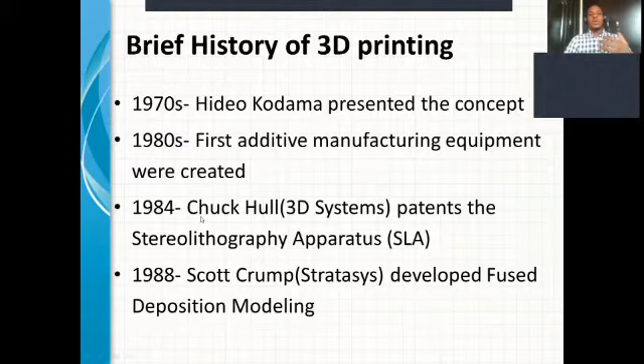In 1988, Scott Crump of Stratasys developed the FDM. These two men are seen as the big names in 3D printing, and they dominated the sector for over 20 years thanks to their patent authorities.

Here is a picture of the first 3D printer made by Stratasys, the first working printer. The beauty of technology is that technologies rely on each other. At the time they were making 3D printers, they were also working with the first computers being made by Apple and stuff like that. So technologies were being formed as at then.

Then in the 1990s, something happened. People wanted to create their own forms of this technology, because Scott Crump and Chuck Hull had patented a particular type of technology. So if you wanted to use it, you would need to pay royalties or get their licenses, which would hike the prices of the printers. So people started developing new technology so they could have their own patents around 3D printing.

So you started having technologies like SLS and DMLS coming up, and several others. Moving on from the 1990s, we have the 2000s. And trust me, this is just as brief as the history can be, there's a lot more to know about it. We have the RepRap movement and all that, but you can research on that on your own.

What I want to take note of is 2009. Something great happened: the FDM patent expired. I call it great because it helped 3D printing grow, but for the companies it was a problem, because normally 3D printers were very expensive—you had to remove a percentage and pay the company that created the software, then pay other bills here and there. That adds to the cost of the machine.

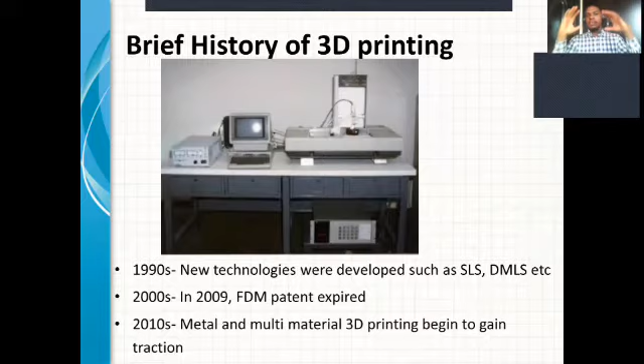Then in the 2010s, we started seeing metal and multi-material 3D printing gaining traction—printing of ceramics, bioprinting, metal printing. People were forming different materials for 3D printing. And that is where we are today. The 3D printing industry has moved from just something Chuck Hull was working on in his lab to something that is a worldwide technology today.

So what is this 3D printing? Before I go into that, I'd like you to read this: it says that 3D printing is disrupting the $12 trillion manufacturing industry, and companies like Ford and Siemens are training workforces to adopt these skills in this technology.

What I would love you to take note of, and personally I like to look at money, is the $12 trillion there. I'm sure many people here are Nigerians—I'm not sure $12 trillion has a name in Naira, but it's a lot of money.

And that's the sector that 3D printing is trying to disrupt. This was given by a journalist at CNBC, and this was his report. This shows that 3D printing is not only something that's fun, but that companies are actively looking to adopt the technology.

So let's give you the definition of 3D printing. It's as simple as can be: a process of making a 3D solid from a digital file. That's why I chose this picture, as a simple explanation. If you look at the monitor, you see a digital file of a 3D object, the Eiffel Tower of Paris. You see the process, which is the printer, the orange SLA printer on the other side. And then you see the 3D object that came out of the process, the three-dimensional solid object. This picture summarizes the 3D printing concept.

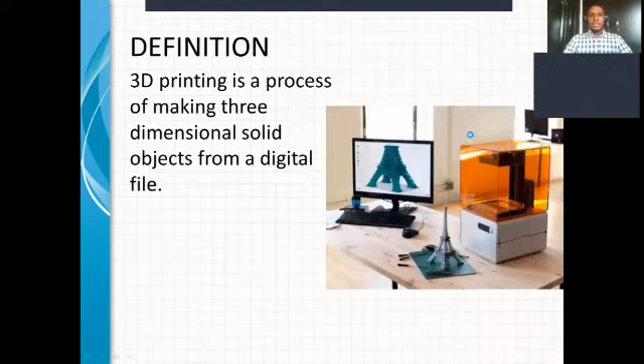All right, thank you, Osage. So, popular types of desktop 3D printing: we have FDM and SLA. The FDM is called fused deposition modeling. The name FDM was patented and trademarked by the company that founded it, Stratasys, so the company has rights to the name. Therefore, other manufacturers formed the name fused filament fabrication so they can represent the technology on their own end. Now another form of 3D printing is SLA.

I'll explain SLA a bit with this next slide. SLA is a photochemical process by which light causes chemical monomers to cross-link together to form polymers. That's a lot of chemistry, and I'm sure people are wondering what this all means, but basically, SLA uses UV light to harden liquid plastic. It has the liquid plastic in resin form, and the light hardens it layer by layer. That's as simple as you need to understand it. You can see the SLA machine inside, and this hatch stuff is the plastic that it's forming.

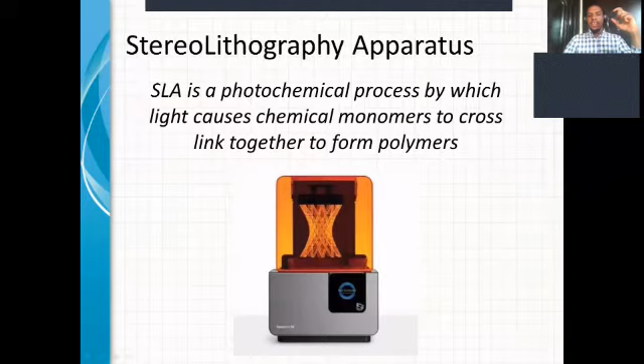Then we have FFF or FDM, fused filament fabrication. This is a separate process that involves continuous laying of filament on a 2D plane to form a three-dimensional object. What do I mean? Let's picture a regular inkjet printer. If you put in a piece of paper and tell it to print, it brings out ink continuously on a single plane, and when it's done, it stops. That process of forcing out ink on a single plane is actually the first layer of forming a 3D object. So 3D printing, instead of having a single cycle, has continuous cycles that lay layer by layer, and instead of ink, it releases plastic.

So how does it release this plastic? There's something called a temperature-controlled heater, which is what makes FDM unique. As against other technologies, FDM has a means of melting the filament, then releasing it into the atmosphere through the nozzle. Once released into the atmosphere, it immediately solidifies, forming your three-dimensional object. So it's a simple solid that melts, then releases to form another solid. That is the process around FFF, or FDM. I want to keep using this acronym so you get used to the terminology.

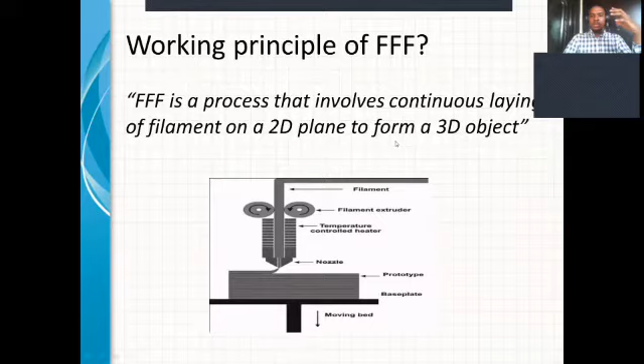So what more is there to know? Why is it included in the fourth industrial revolution? So many people ask me, what's up with this fourth industrial revolution? Why do we need to care about the industrial revolutions and stuff like that? So I would like to talk a bit about the four industrial revolutions very briefly.

The first industrial revolution, I'm going to focus on manufacturing, because industrial revolutions happen in many sectors, but I'll focus on just manufacturing. So the first industrial revolution included basic mechanization. We had steam engines, looms, and stuff like that, just basic mechanization processes. People started learning how to burn fuels, how to do stuff that would create energy.

By the second industrial revolution, something great happened, and I'd like everybody to take note of this: that is when mass production started, and that is why consumer goods are a thing. A man named Henry Ford brought up the concept of mass production. Henry Ford was the founder of Ford Automobile, and he believed in democratizing the automobile for everybody—everybody should have a chance to drive a Ford car. That was the first mass production assembly line in the world, and it led to many others in jewelry, cosmetics, and even mass production of chocolates coming up within that era. So that was an industrial revolution of its own.

Now, the third industrial revolution was around automation, which is kind of what we are living in today. We see many companies, especially in Nigeria, focus on having robots in their labs and factory spaces, with things happening automatically while humans supervise. But it still has its limitations—humans must supervise, and there's a limitation where a particular plant can only do a single thing, not being very flexible.

It allows for optimized design with reduced constraints. Still on the design topic, let's assume I want to design something difficult, maybe with some particular problems with the geometry. 3D printing will be able to get it done because it is based on what you design in your CAD file that the computer will print.

Then it allows for—I'm hoping you guys can still hear me. I noticed that rain just started falling in my environment, but I'm hoping everyone can hear me. So I'll just move on.

This is a very important point, and I'd like us to take note of it because personally I'm very enthusiastic about this: it allows for distributed or local manufacturing. What does this mean? Let's picture a mechanic who wants to make the interior of a car, maybe the plastic handle of the door or a radio compartment. During this COVID era, he cannot import anything because the borders are locked, or it will take a longer time and more money to import anything into the country. So what can he do?

Now, if a company like Toyota is interested in distributed manufacturing, they would have their servicemen or mechanics around the world with standard Toyota 3D printers. Whenever you need a product, all you need to do is download the digital file from Toyota and print it in your local workshop. So it localizes manufacturing. It doesn't have to all be centered around the fabrication or manufacturing plants; it can happen in different spaces closer to the consumer or customer.

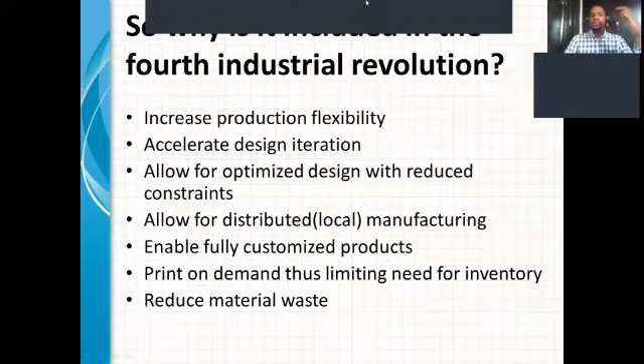So before we conclude, since we're done with the revolution, I want to go into the applications. And what are the things that you need to know about these applications?

Now, many people have told me about how they want to know what COVID-19 is doing. And I don't need to stress on that because we see every day on the news—we see Senegal making a $60 ventilator that you can 3D print. We see different companies doing different things.

So I'll touch a bit on what's happening around COVID-19 because this is a very challenging time for the world concerning 3D printing. So we have the printing of face masks, printing of respirators—this was done in Italy—and we have the printing of face shields.

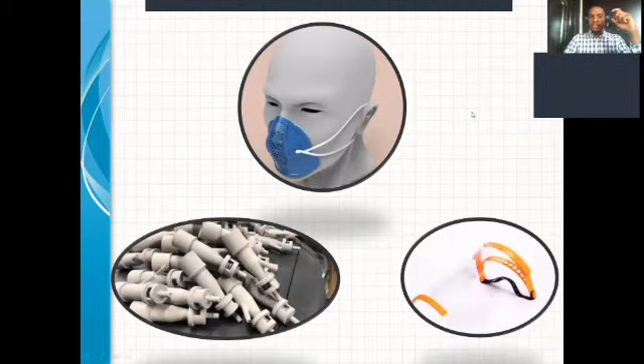But what are the futuristic things that can be done in 3D printing? What are the things we are excited about? What are the things that we look at and say, wow, we are going to get here soon? I heard about one today—SpaceX, concerning 3D printing of things in space. So there are different things being done in 3D printing.

So we have the 3D printing of food. This looks like it's far ahead, but actually many companies have found ways to print different food materials, just that they are limited by the kind of materials they can print and the need for the food, because by that point it's exotic materials that you're printing.

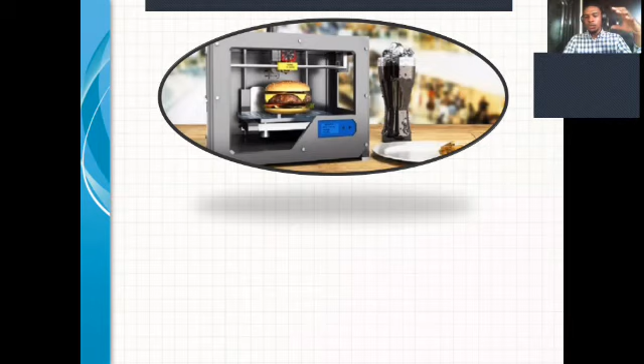And then we have the printing of houses. We all heard about China printing a house in 24 hours and stuff like that. We also have the printing of organs.

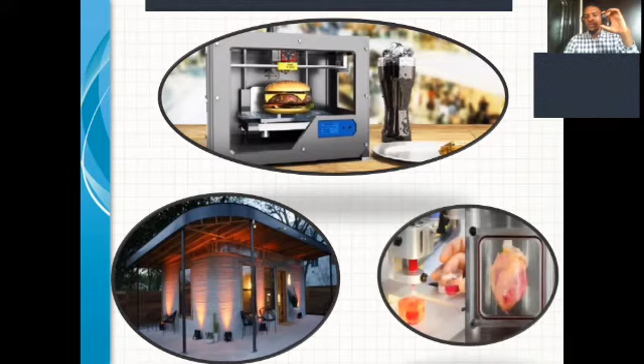Now, this printing of organs is something called bioprinting, and it has made medical doctors really excited, because instead of needing transplants and moving organs around, you can sit your patient down, collect cells from him, replicate these cells, and then create whatever organ you need. For now, they haven't gotten to the perfect point where they can replicate organs for functional use, but they've made a lot of progress in terms of cells, tissues, and parts of the body. All right, so that's on bioprinting—you can also research more on that.

So I'm going to show you a short video concerning the 3D printing of a house, so that you can see what people are doing with 3D printing.

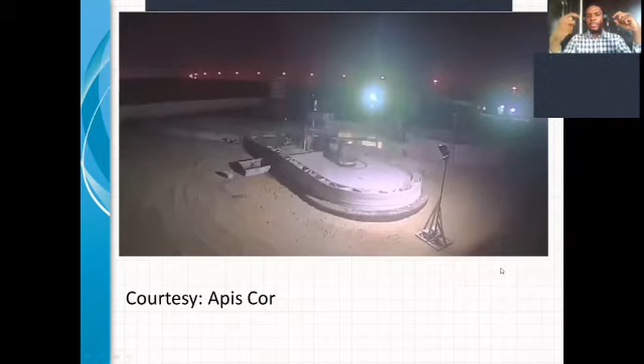So here we can see the printing of the house. This took 24 hours, working day and night. You can see a robotic arm working. Yeah, this house is in Dubai—it's the world's largest 3D printer.

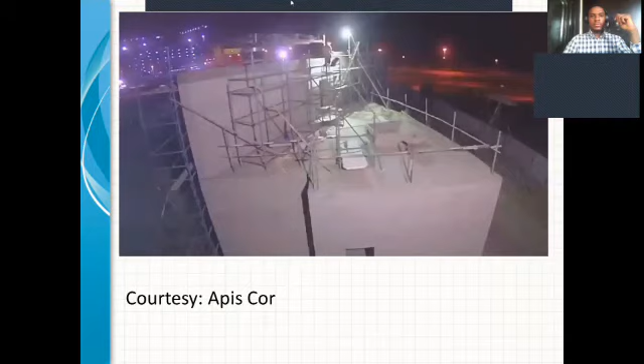So I know a lot of architects and civil engineers that will be very excited by this. They're like, wow, I see what 3D printing can do. People used to know before you can print small scale models, but now people are printing houses that they would actually live in and are structurally sound thanks to the miracle of 3D printing.

So who uses this technology now? I want to tell you about companies that are directly applying it. We're not just talking about futuristic things or things a few have been able to try with 3D printing, but companies where 3D printing is part of their actual process.

One of the big giants in this is General Electric. They even started their own 3D printing sector to show you how important this is to them. They are the makers of jet engines and aviation, and they're also in the healthcare sector.

Now how does General Electric use 3D printing in their jet engines? Normally, if you want to create parts of a jet engine, you would need to create small parts and then couple them together, with bolts and nuts and so on. But with 3D printing, all these parts, which would end up being clumsy if connected and would have failing points, can instead be printed as a single unit, which is more efficient and lighter. Lighter in the sense that it wouldn't have all those bolts weighing it down. So it's lighter and thus much more efficient.

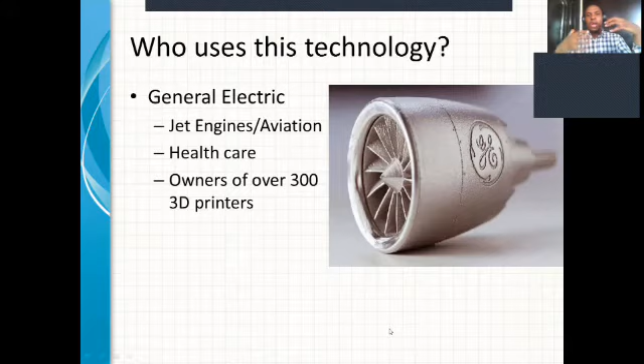And just for perspective, they own over 300 3D printers that they actively use. So this shows you how important this technology is to General Electric.

All right, Sonova. Sonova is a 3D printing factory, and this is very exciting for me because I've always longed to see the words '3D printing factory' together in one sentence. A 3D printing factory is where they have a lot of 3D printers and it works like a regular manufacturing plant. So how does Sonova work?

Sonova makes hearing aids which are customer specific. So it needs to match the ear, it needs to fit, it needs to meet certain requirements set by the customer. They have a design team — when a customer comes, the design team designs hearing aids specific to that person, and then the 3D printing team gets the print done, finishes it, and sends it to the customer. This is a very exciting company.

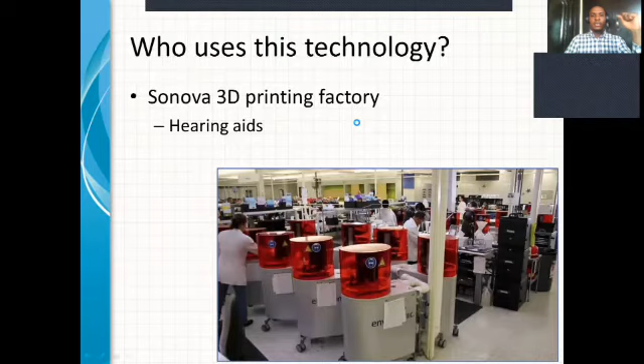This is also another company that does a similar thing, Oral Arts Dental Lab. They also make dentures specific to consumers, and then these dentures — the pink part that holds the artificial teeth — are given to their clients.

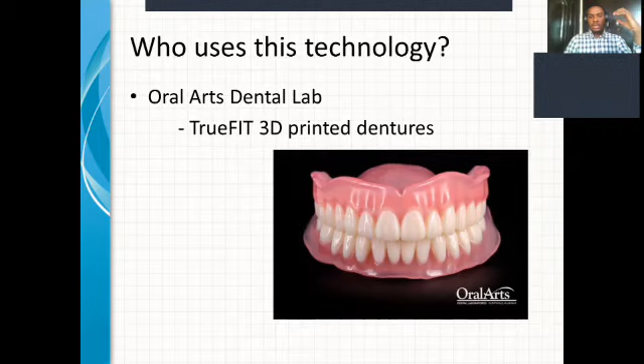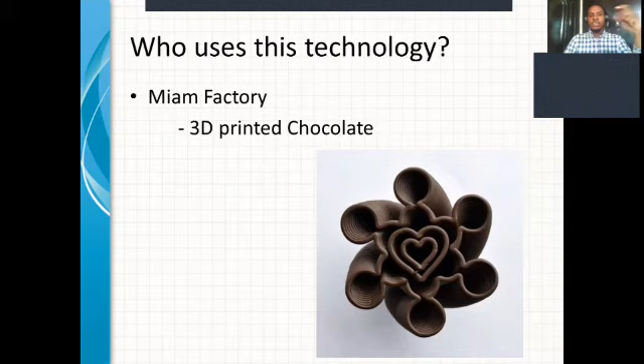All right, then Miam Factory — remember I told you earlier about 3D printing food. I think this company is in Italy, and this is a company that 3D prints chocolate. They are a big name in 3D printing in the country, and they specialize in printing exotic chocolate shapes. So people who can afford them, or companies that need chocolates for specific events, can meet them and get this 3D printed food. Note that this food meets all food standards, any country's food standard — it's approved, so it's healthy for consumption.

We have Airbus. I put this Airbus example here because they didn't directly look for 3D printing — there was no other solution, so they needed to use it. What happened was, Airbus has jets, and they're always looking for ways to reduce fuel consumption by reducing the weight of the jet. In that process, they looked at the partition between entering the jet and outside, or between the cockpit and the rest of the plane. They saw this partition and felt it was a waste of material — it was just a chunk of metal. So they decided to reduce it. How can they reduce it?

They use a software called Fusion 360 to carry out generative designs. These are two different designs that Fusion 360 presented on the screen. If you look at them, you see that they found out they can use less material, thus making it lighter, and still achieve the same strength and efficiency.

But when they had this, they did not know how they would be able to print it or make it. So they turned to 3D printing, because if you're using traditional methods and make a single mistake at any point, it would affect the whole structural design. So they turned to 3D printing and printed this shape. After printing, they created a mold around it, which they used for mass production. So they needed 3D printing to carry this out, and luckily the technology was available for them.

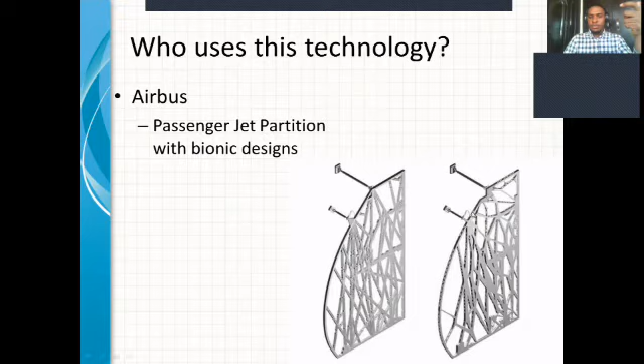Moving forward, we have Ford. Ford makes automobile cars and automobile parts. They use 3D printing for some of these parts and for prototyping in Ford Labs. You can see the car here, which they use to carry out their analysis, check for fluid analysis and the rest. A bit technical, but just know that Ford uses it for their prototyping jobs too.

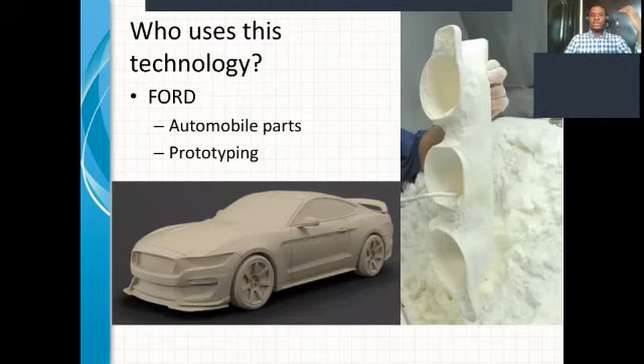And we go over to Whitehurst. Whitehurst is a company that works with jewelry, also customized, similar to Miam Factory that customizes their products. So you request a customized shape of jewelry, and Whitehurst produces it for you, prints it out in whatever material you want, or whichever one they think will work best, and gives it to their clients. Simple as that. And then lastly, we have Boeing.

Boeing Dreamliner 787 has been in the news a couple of times. This is important to note: every Boeing plane has 30 3D printed parts, including air ducts and hinges. This shows that for every Boeing plane that leaves, they have at least 30 parts. This shows you how important 3D printing is to them.

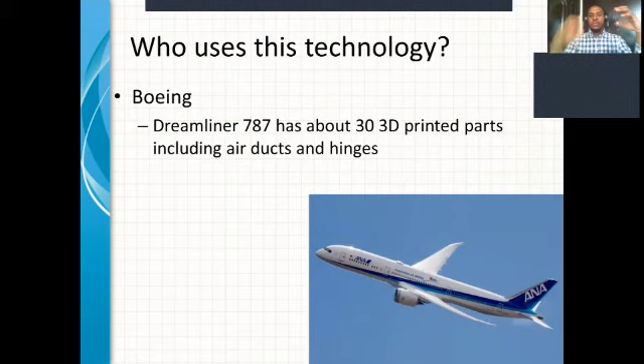So how can this knowledge be applied? I know most of us in Nigeria are saying, yes, 3D printing is cool, you've told us how it works, but how can it be applied? Before I answer that, because I have a couple of things on how it can be applied, I would like you to know that I don't want to limit us to just what can be done in Nigeria.

In my opinion, we need to focus on what can be done internationally. We need to focus on what people are doing, because the world is getting digital. We can't hold on to only what is happening in Lagos or in Abuja and Port Harcourt. We have to go, or in Benin, as Usefull Tech is in Benin. So we have to look around at what's happening around the world. We have to keep up with the latest research and technology and join the global revolution.

But for what is happening in Nigeria, I would tell you, you can design prototypes for 3D printing. That is a very popular thing. There's something called Thingiverse. This is a repository that has a lot of models. People design there, and when you design a model and post it on Thingiverse, you have the license. So anybody can download it, but if they want to use it for commercial use, they have to pay you for that license.

And that's just one way you can use 3D printing. You can also use it if you're designing for companies or organizations. So you can work with organizations who have 3D printers and prototyping. At one point, Tranos in Lagos, that I know of, had a 3D printer which they were using for prototyping for their clients. So any organization that owns a 3D printer in Nigeria will be very excited to hear that you know how to 3D print or understand the technology.

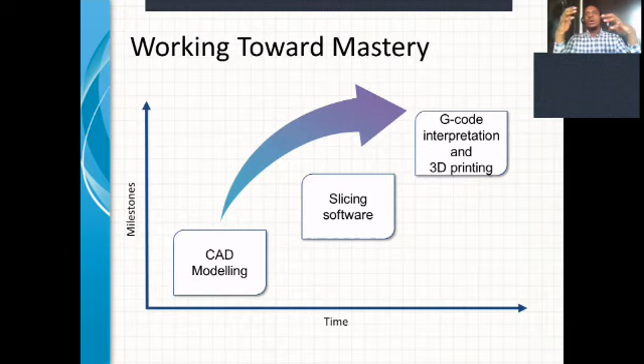Moving on, you then use the slicing software, which prepares those designs, and then you print. So those are the milestones that you need, and then you learn how to work with the 3D printer. You understand its hardware, you learn how to fix it, service it, maintain it, and stuff like that. So it's a series of processes, and I will show you an example.

This is a project I prepared for somebody in the spirit of Valentine's Day. A client told me, can you help me make a pendant? He wants to give it to somebody, and I was like, okay. So he gave me a sketch of what he wanted. He was trying to be creative with the design, and I made it in Fusion 360. I prepared it with the slicing software, and then I printed it.

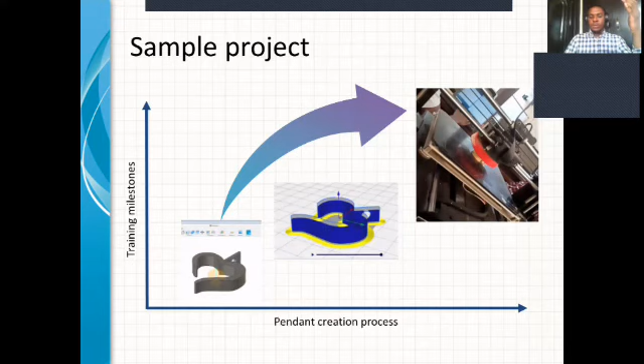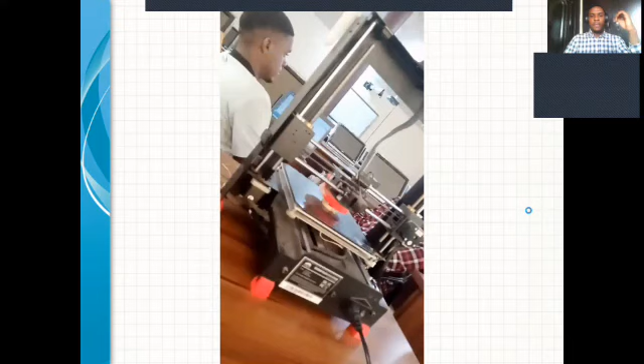There's a short video of it printing. I don't know how fast the video is, but I slowed it down just so that you can see the printer move. It is at the last layer, just trying to complete the print. So this is a Wanhao Duplicator i3 Plus printer, and this was the finished product. Here's the pendant, attached to a necklace.

All right, so that concludes our seminar, and that is all I wanted to share on the revolution, the technology around 3D printing. More on USEFull Technologies.

So I'm just in the 3D printing department, so to speak, of USEFull Technologies, and they do trainings and stuff like that. They have two sets of trainings: introduction to 3D printing, and intensive trainings on 3D printing. So the introduction goes far deeper than this. This is just touching the surface.

However, with the intensive training you would come out as an expert in the technology and be able to use it anywhere you want. So depending on what you need, you can then opt for whichever training you want. There may be virtual trainings during this era of COVID, but I don't know how it's going to be.